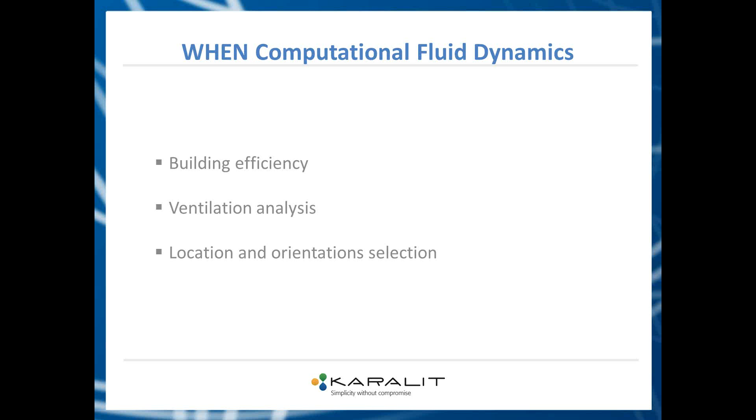Computational fluid dynamics, also known as CFD, is the most sophisticated airflow modeling method, and can simultaneously predict airflow, heat transfer, and contaminant transportation in and around buildings. So CFD provides answers to different questions. Let me throw out a few of them. Number one: what sort of temperature distribution could I expect in an atrium under clear sky and summer conditions? Maybe another question: will the arrangement of supply diffusers provide adequate air movement? Or is the location of the radiators going to provide good comfort conditions? Maybe, are there any regions of stale air inside the buildings? So those are a few of the questions that CFD answers.

Let's analyze a few of the advantages of doing CFD. Number one, we lower the construction cost by leveraging simulation rather than physical mock-ups or prototypes. There are money savings because we avoid physical wind tunnel tests and field measurement. Another way to look at it: you can have faster time to market because you have prediction capabilities performed virtually. You can have more energy efficient buildings, and you can create more comfortable living environments. So those are a few of the values that doing CFD can bring you.

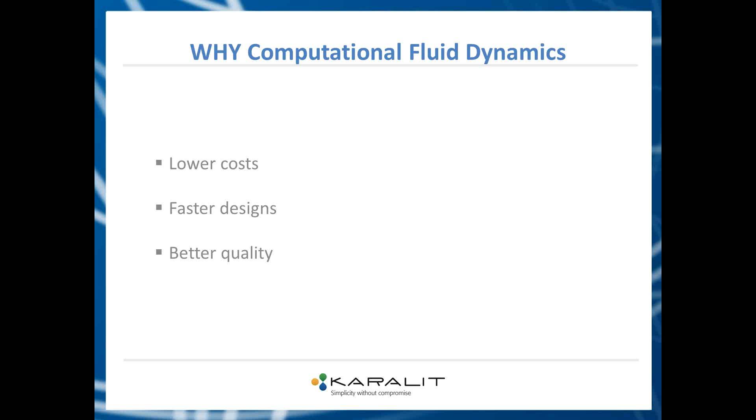Let's review now a few more stories with some practical cases from the field, presented and discussed by an expert in the field, Ricardo Rossi. Ricardo, please join me.

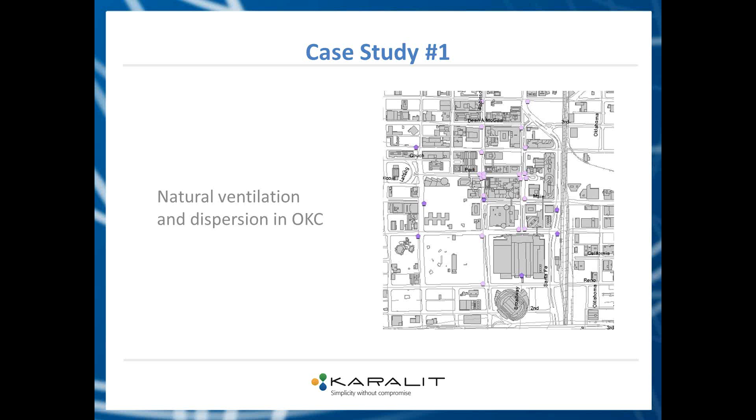Today I would like to show you some examples where CFD can be used to improve the design of buildings and also the design of the built environment in general.

I would like to start with some results about the simulation of the wind field and dispersion in Oklahoma City. For those familiar with OKC, you will probably recognize the Chesapeake Energy Stadium in the foreground, and in this urban area we also have some high-rise buildings in the background in the city center.

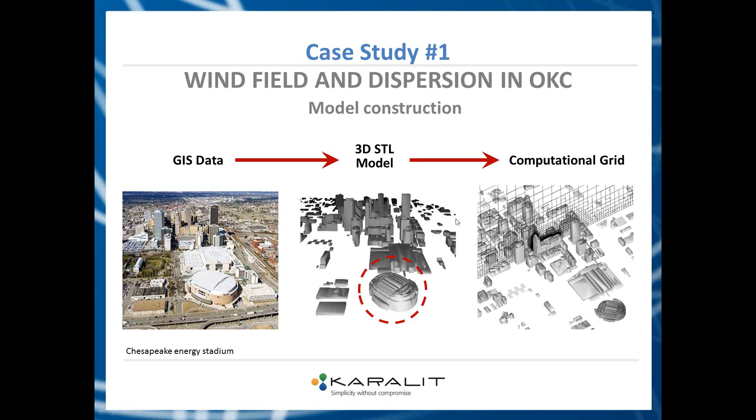To perform this kind of simulation, we need to create the geometry model first, starting from GIS data, where GIS stands for Geographic Information System. Then from the STL, we need to create a computational grid, which in this case will look a bit complex because of the complexity in this geometry. I'm not going to go too much into the details for the grid generation, but Alberto in a few minutes will show you how easy and fast this task is in Catalyst.

Of course, when buildings interact with the wind, there is also a lot of turbulence generation, as Alberto will show you afterwards in a simpler environment.

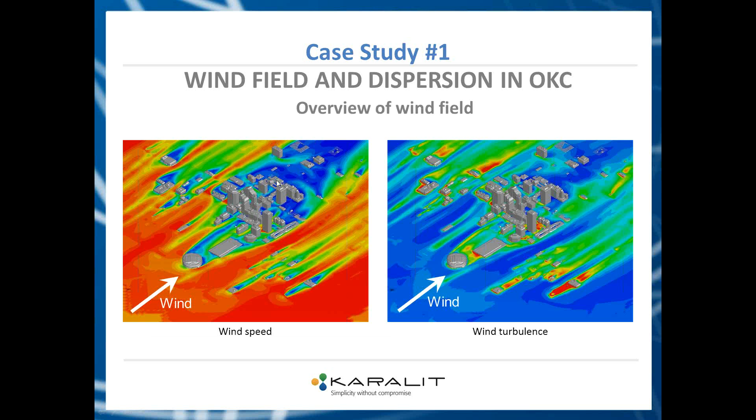Keep in mind that the wind is exactly the same in the two cases, and in particular we are dealing with this scenario where we have a very strong separation once again downstream of the city center.

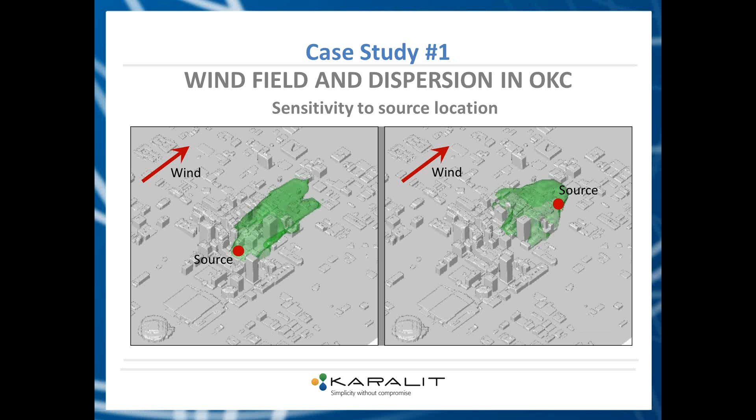The last thing I would like to discuss is the effect of the wind angle, and to do this I'm showing some results for a slightly simplified urban geometry. Now I'm not taking into account all the details.

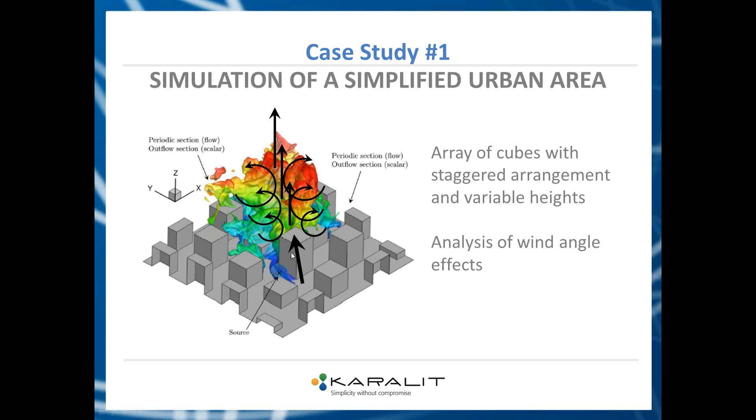So once again, we have a source here for pollutant generation, located next to the tallest building in the domain, and we're going to take a look at the dispersion process downstream of the source. So here's the first movie.

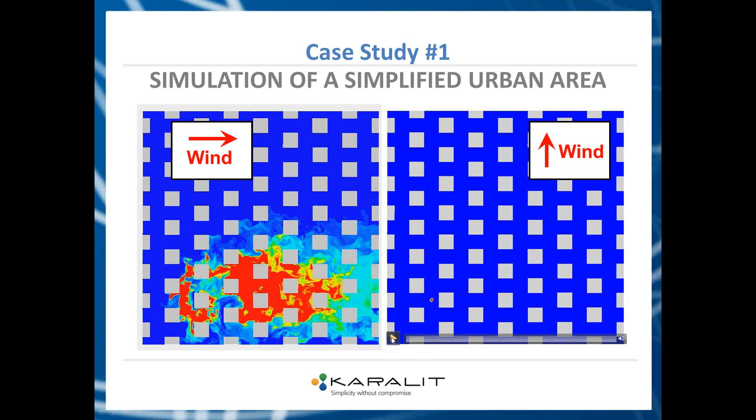So now let's take a look at the other case. Now the wind is coming from the bottom and moving to the top of the image. Once again, we are looking from the top at the contour map of the pollutant concentration.

Here is the source, and you can see that at the very beginning the pollutants are moving downstream. Only after a few seconds do you see that there is also some upstream movement of the pollutants.

The interesting thing here to note is that there is a very different spread in the span-wise direction, because now the buildings are aligned. There are channels basically created in this direction of the flow, and because of that there is much less spreading of the pollutants in the span-wise direction.

So again, this is just to show you another result that should bring to your attention how much you can gain out of a CFD simulation. For now, I'll stop here, and I'll go back to Alberto, who's going to show you a little bit of a demo with Karalit from this kind of application.

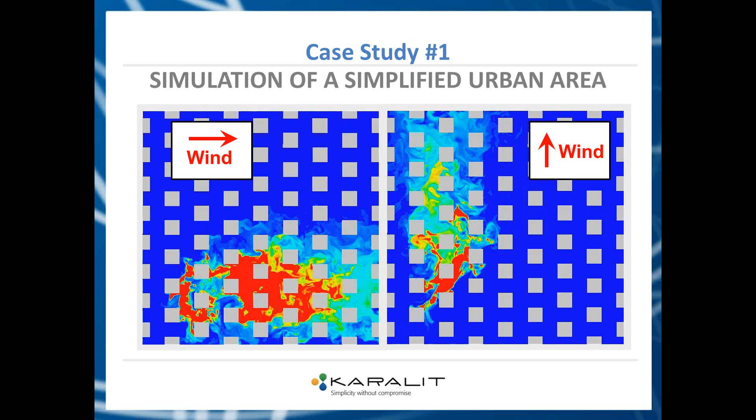Thank you, Ricardo. That's a great story about Oklahoma City. So before going to the live demo, let me give you at least a couple of reasons why you want to use Karalit CFD to perform this type of analysis.

Well, the first reason is Karalit CFD definitely eliminates the meshing stage, saving up to 99% of the user preparation time. This is due to a technology we have that is based on the immersed boundary method, something we are not going into during this webinar.

The second reason is that Karalit CFD does not require any in-depth CFD knowledge because of the use of customer-specific apps. Today I will show you the app just developed for architects, specifically for you, architects and civil engineers, to support your specific design flow and validation.

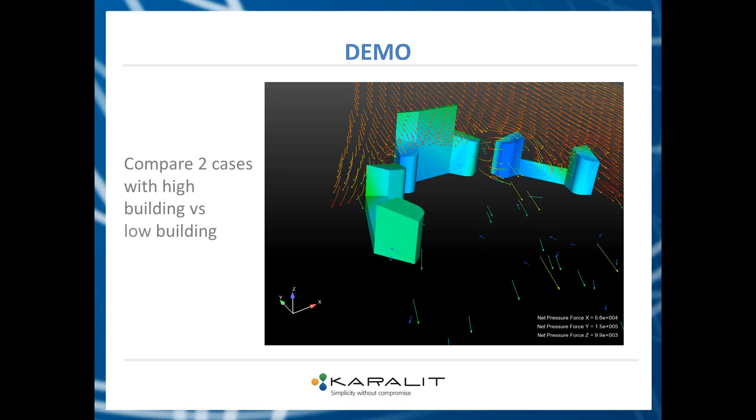Okay, so now let me iconize the presentation and run Karalit. This is how Karalit is showing. Let me make it a little bigger.

So the first step to do, well, we are going to create what we call a new case. Let's call it case number 1. So the first thing is that we are going to say that, well, this is what we call environmental flow, used by architects and civil engineering.

We're going to import some surface. Remember, the first step is to import the CAD geometry. And here we are going to import the west side of the plaza. You can see here.

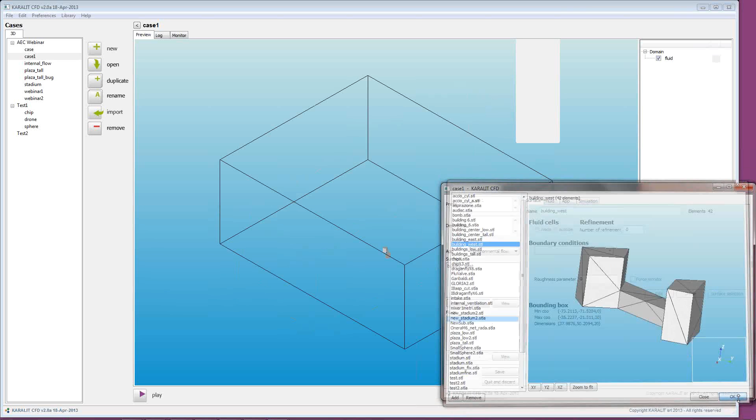I'm going to specify a few parameters for the grid generation. We're going to import the east part of it. Okay, I'm going to define the same.

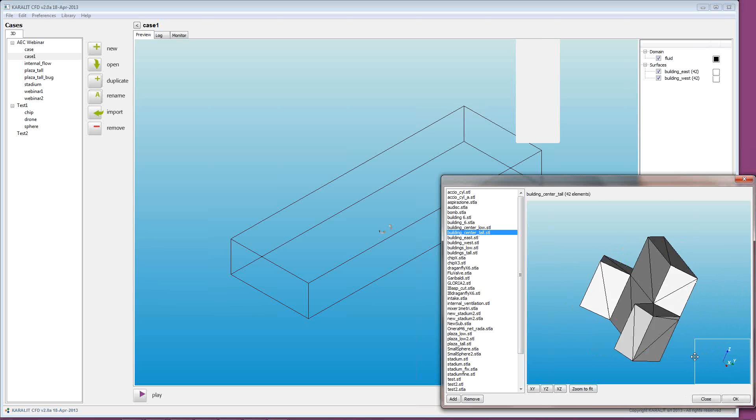The third thing we're going to do is import the high profile building that is going to be at the center of the 3. Here we go. Okay, say OK.

Define a few parameters for the grid, and so on. You can see here, this is where, that's how the 3 buildings are going to look alike.

Okay, I lost my window right here. Sorry about that, I lost my window.

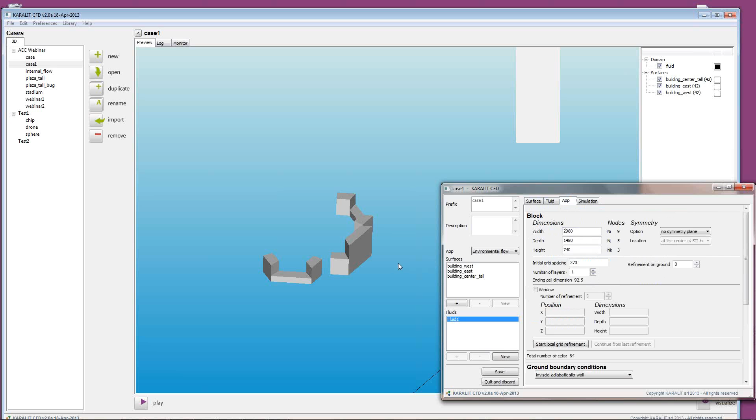So the next step is, as you can see here, let me take a step back. As you can see, the box here shows the area of the simulation. Maybe what we want to do is, very far from the building, we want to take a little smaller area.

Like for instance, we're going to do, let's put 200. Those are meters, by the way. Okay.

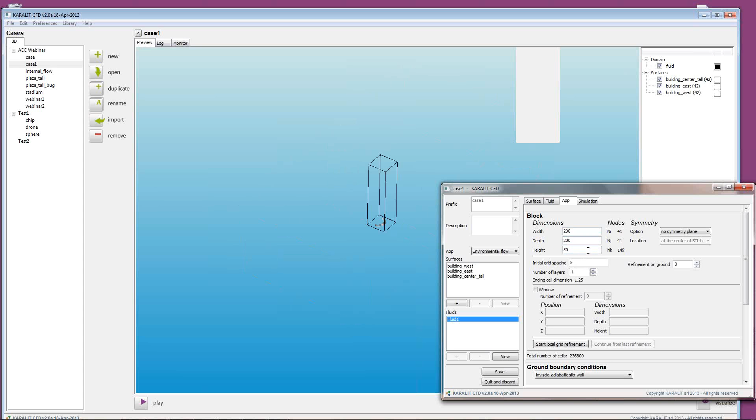As you can see here, that's what we are going to have, a smaller boundary where we are going to be interested in the area, right?

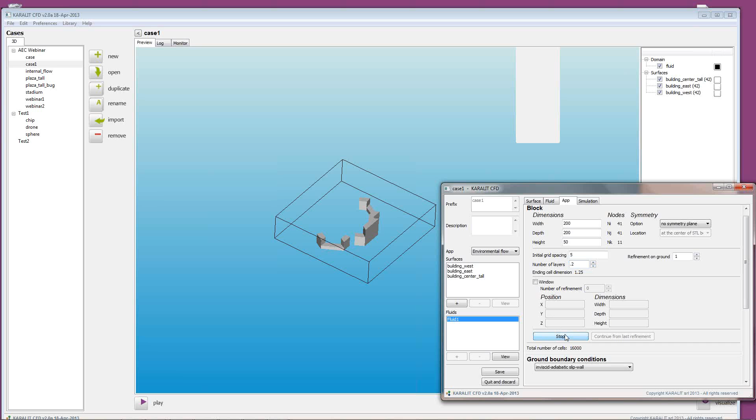Now, we saw before that there's a grid generation, so that's what we are going to do. We are going to start a generation of a grid that is going to be used by the software to perform the calculation. As you can see here, the grid looks like this.

Let me give you a little, okay, where we have refinement close to the ground, much better refinement close to the buildings. And while we are far from the buildings, we can use a coarser grid. Obviously, this grid is in 3D, as you can see.

The other thing we have to do is define some parameters like the wind direction, the wind velocity, and let's put a value there. It's 5 meters per second.

Then we have to decide where is the wind direction. So let's put it as something like that, north-northeast. Okay, so those are the information that we need.

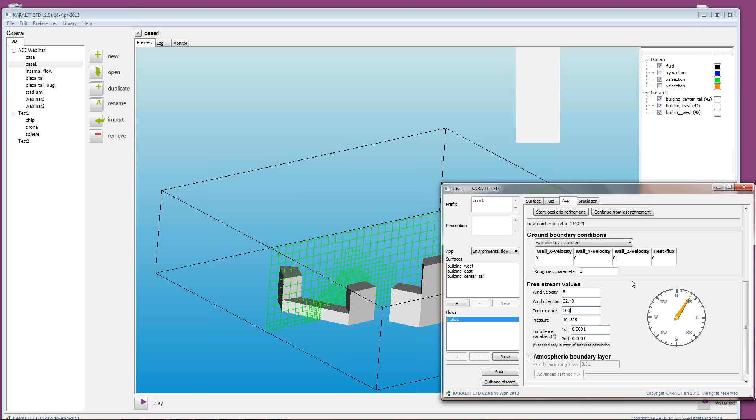Maybe what we're going to do is a calculation at summer day, 300 Kelvin degrees, obviously. The other thing, the last thing we have to do is specify some information about the gas. The gas is going to be the air. It's going to be a turbulent flow, and that's pretty much it.

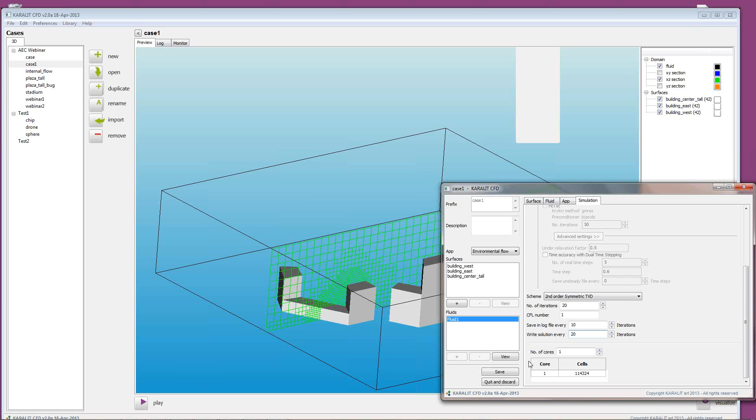Really, the last thing we have to do is define how many iterations we want to have to do the full simulation. Obviously, we can go hundreds of those, but for the sake of this, just put 20. I think this is going to give us a good indication.

So we save it, and then at this point, we start the simulation.

So at this point, what we're going to do, well, let's look at the log file. We see here that the software is going to take into account the grid, is going to take into account the geometry, and is going to perform the calculation.

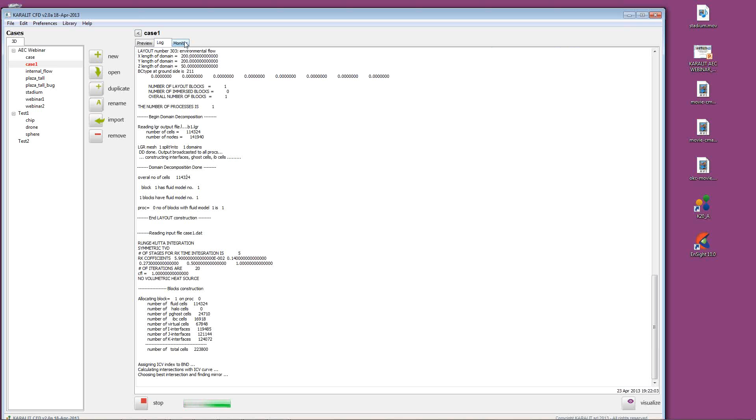And this is the log file that if you want to have a look at it, you can monitor it. Let me jump to the end of it while this is crunching, so this is going to be a little more interesting. So this is the outcome of the simulation.

So you can see here, those are our buildings in full 3D. The buildings are colored, showing a color map of the pressure. Actually, it's the relative pressure, the pressure over the atmospheric pressure. This allows us to calculate the forces acting on the buildings.

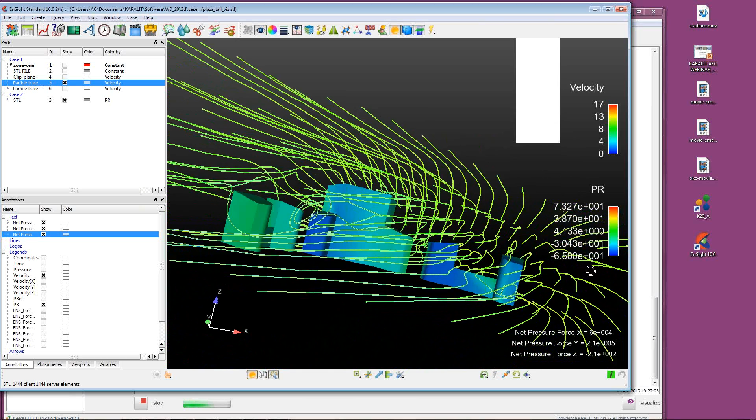Another thing we can do is also show what we call the particles of the wind. Okay, so let me show you the particles. If you take a particle of the wind, this is a trajectory basically of the wind. And one thing we can do here is let me start an animation of it.

Okay, so you see this is the effect of the wind. It's very easy for an architect to understand what's going on now with a very visual indication.

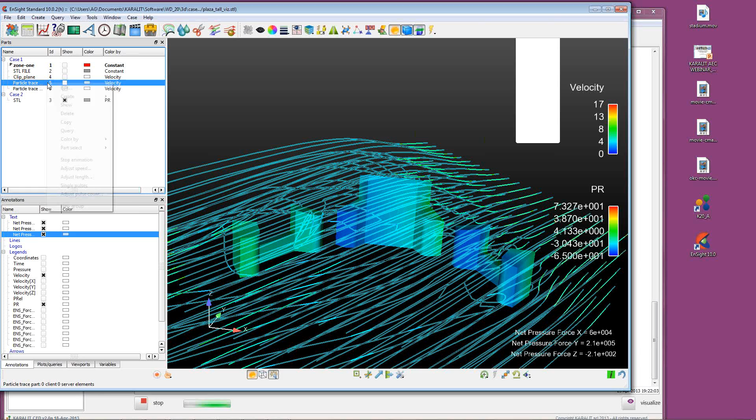I think why we might be interested here is to take a better look. What we are interested in is to understand what happens for a man standing in front of the building. So what you're going to do is have maybe a 6 feet mark, and you're going to see the effects of the particle at 6 feet.

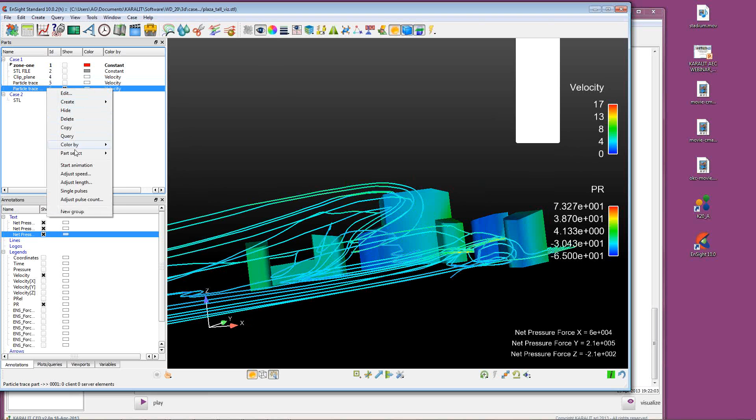What we can do is start the animation of it and start the effect. I hope this is very clear for an architect to understand what's happening at this point. Another thing we can do is understand the different velocities and speed.

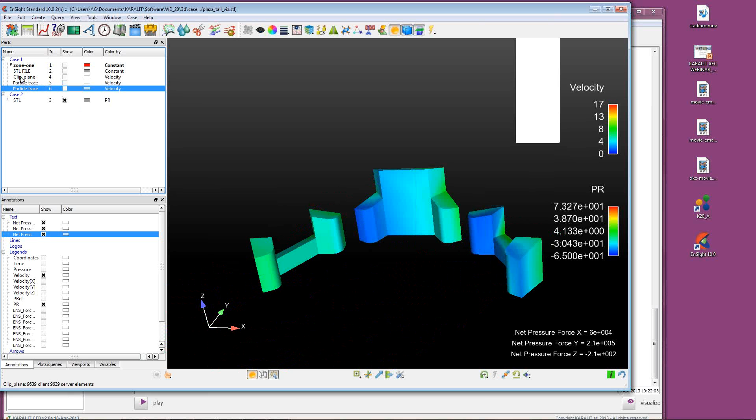Let me show you right here. So this is the velocity. Can you see here the various velocities?

What you can do is actually interact with that. You can go in kind of a section dynamically through the entire plaza and see where you can gauge the effect of the wind on a person. So this is what you can do with our software with a full simulation.

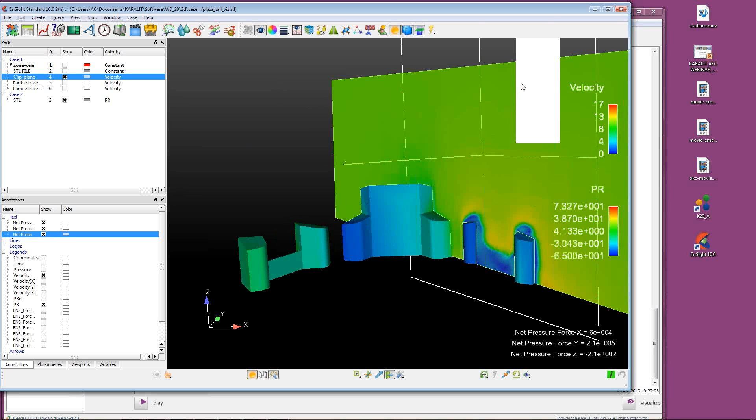Probably if you have 200 or 300 iterations, you will see a better convergence of that. But it just takes time, so you need to get an extra cup of coffee. As you see, it was very quick to run 20 iterations.

So now what we want to do is evaluate the effect of taking a different geometry, as I said before, the same building but with a lower profile, and see what are the effects of that. So let me open again our case, okay?

And we are going to replace the tall building with something that has a lower profile. Okay, you see that? That's a lower profile.

I'm going to put in the usual information for the grid. I'm going back to the application, and let me change this. We define a smaller area for our simulation, and again...

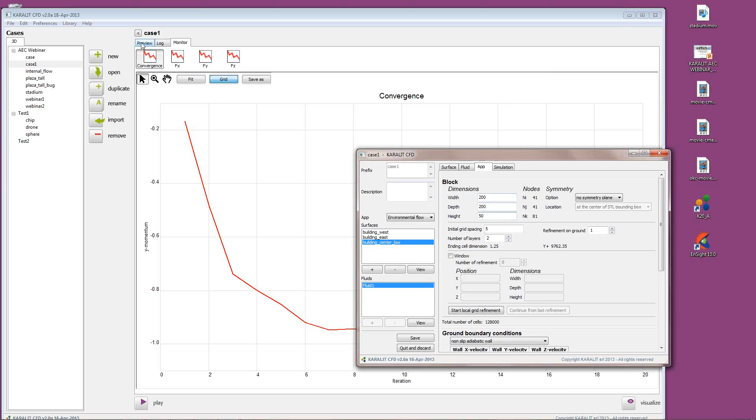This is going to be our new plaza. Okay, start again our grid generation using our immersed boundary method, which is a unique, proprietary methodology. Save it. Now we are ready to run it again.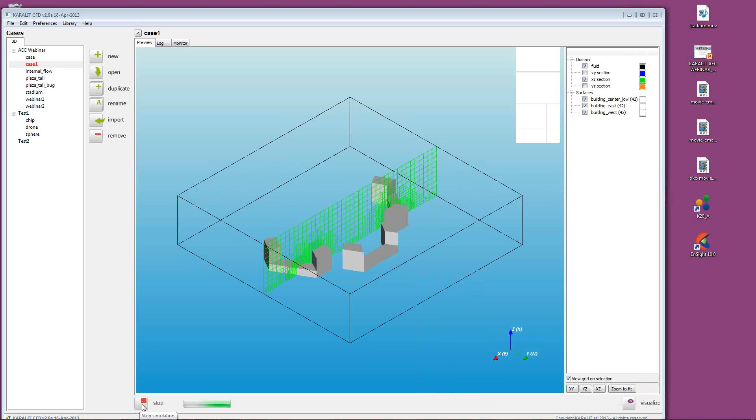So those are the steps that an architect is going to perform to do any simulation.

Okay, so while this case is running, as I've done before, let's take a peek at the comparison of the two scenarios, or the two cases that we ran.

So what we are going to see here is that on the left side we have the low profile building, and on the right side we have the high profile building. See a pattern here? You see the difference?

On the right side, as we are expecting, we were expecting obviously more turbulence. As you can see here, this area probably is not going to be very comfortable for people to stand, while with a lower profile we have better smooth lines, so less turbulence.

So this is a great indication for an architect to select the best scenario for building a plaza. And this is proven, and this is something you have done virtually without any testing.

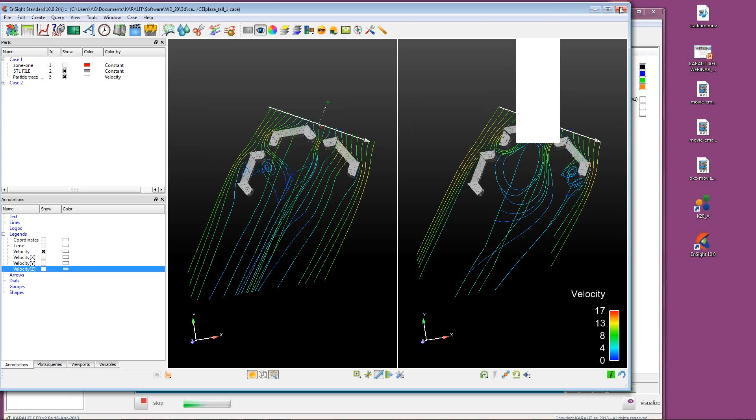So far we've used a very simple geometry here. Let me switch gears and show you a different case where we have definitely more complicated geometry.

This is a real geometry, about a stadium.

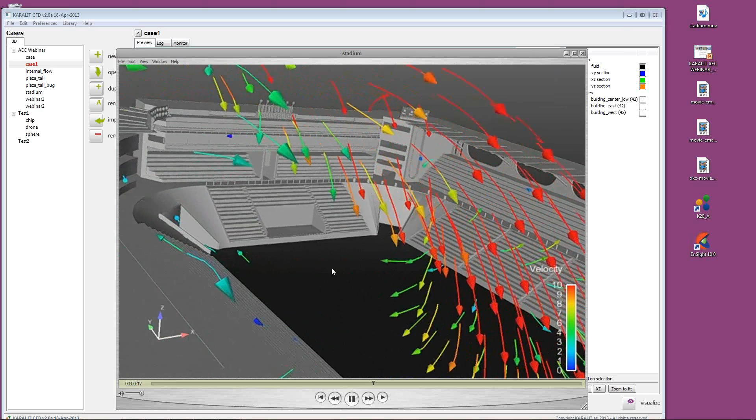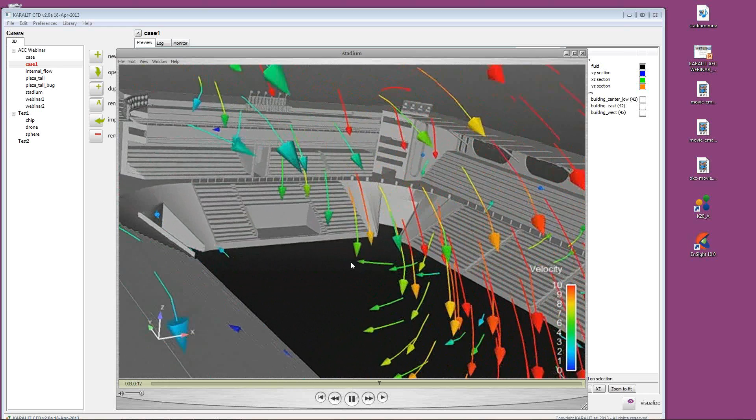The study here, and the challenge for the architect, was to determine if the players on the pitch, this stadium being for soccer, or what in Europe they call football, would be affected by the wind in every condition. Basically the stadium is going to offer a kind of shield to the wind, so that the players on the pitch are not going to be affected.

So this is a more complicated geometry. Obviously it's going to take a little more than 2 minutes to run this. We're talking about minutes, maybe a couple of hours, to run a complete simulation of this.

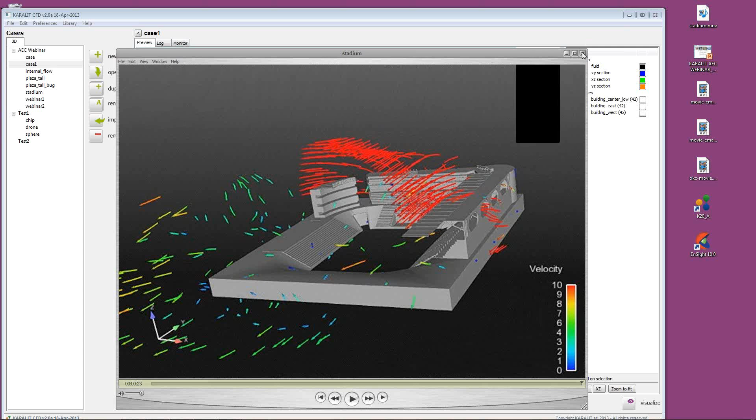So this is what I want to show you, and what I'm going to do at this point is go back to Ricardo. Ricardo, please introduce us to the next theme that we are going to talk about, internal flows.

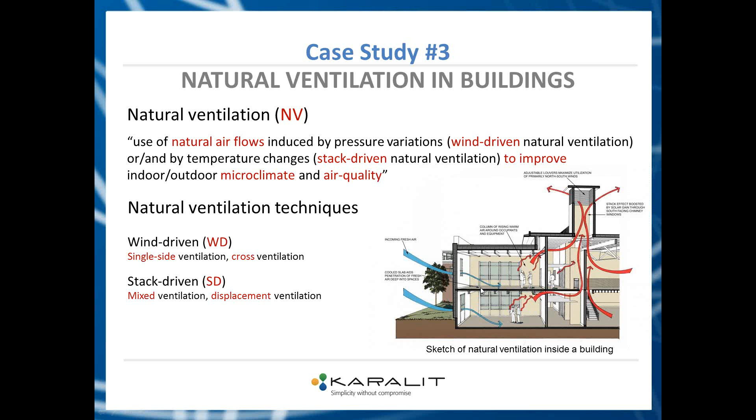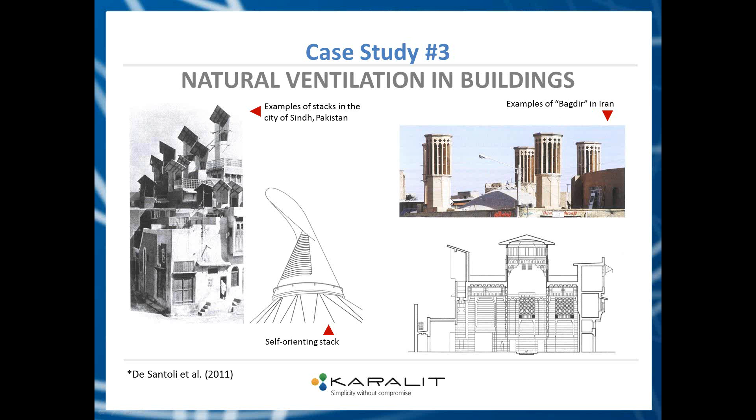For today, I'd like to focus on a case study which is a bit more recent - the Y2E2 building at Stanford, which is home to civil and environmental engineering there. As a visiting scholar, I was involved in this project where we performed analysis of a process called night purge.

The basic idea is to use the cold air in the evening to cool down the building and get lower temperatures inside the rooms the morning after, so that you would save some energy out of it.

The target for that was pretty challenging. The design was targeted to 50% energy reduction and 80% of the building lit by daylight. To achieve that, the building has sensors inside to monitor its functioning, and energy modeling has been performed with tools like eQuest and Energy Plus that perhaps some of you may be familiar with.

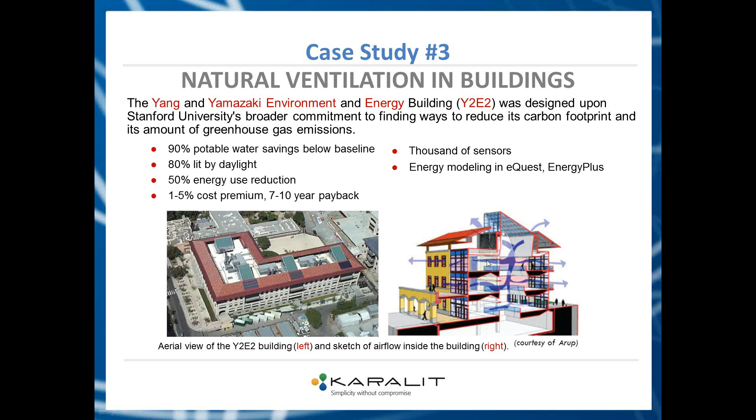Let me spend a few words on how this night purge process works. Let's imagine that during daytime, the envelope of the building and the inside of the building are warmed up by solar radiation. If we look at the temperature inside during the day, we can see temperatures in the rooms and offices going up, reaching a maximum around 4 o'clock in the afternoon.

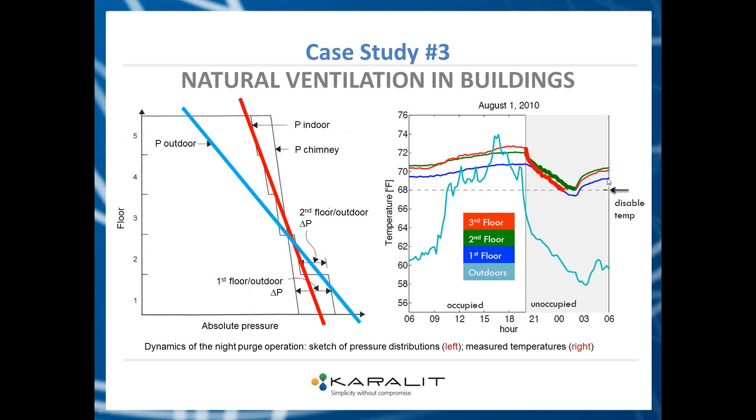Around midnight, we have a disable temperature setting, because we don't want to freeze people the morning after. So we want to go back to a temperature level which is lower than without the night purge, but still more comfortable for the occupants.

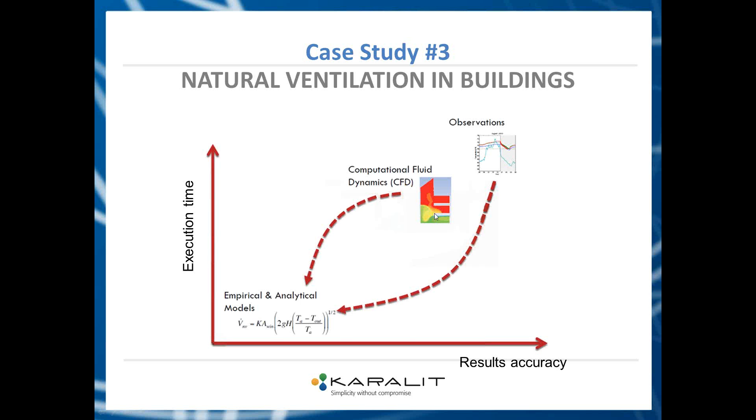And then we have CFD, which of course can be used to learn more about parameters in these approximated models, and to gain more insight into the process of night purge or natural ventilation in general. With this very last slide, I just want to show you the process of mixing inside the building as the night purge goes by.

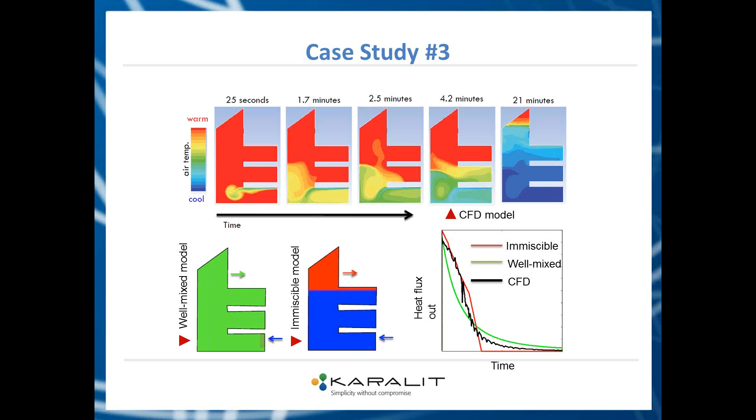Now let me show you how to perform a study on internal ventilation for a building, following what Ricardo was saying. Let me minimize the application, and let's go back to our software KARALIT.

What I wanted to show you is a case where we are going to study different types of ventilation for a building, comparing different scenarios where various options are considered using various window locations and openings.

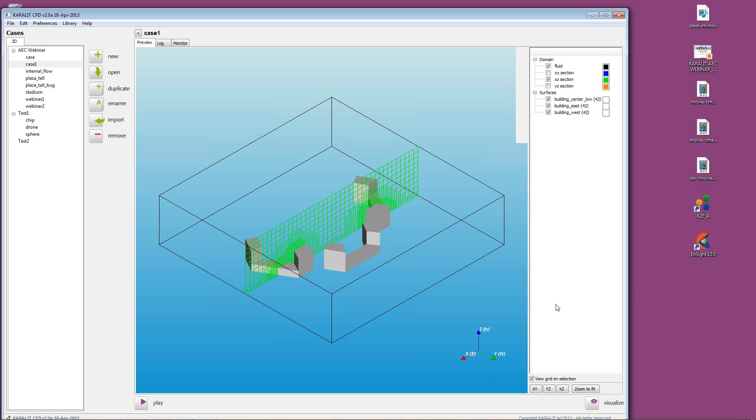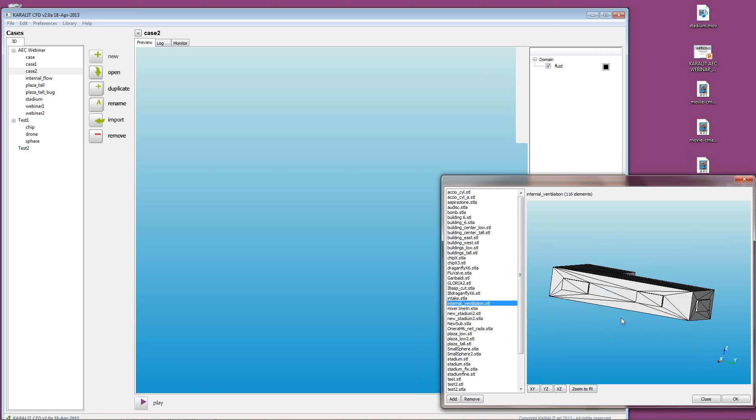The geometry in this case is pretty easy, but it just gives you the idea of how to perform studies for internal ventilation. So we import it, and we are going to set some parameters for the grid.

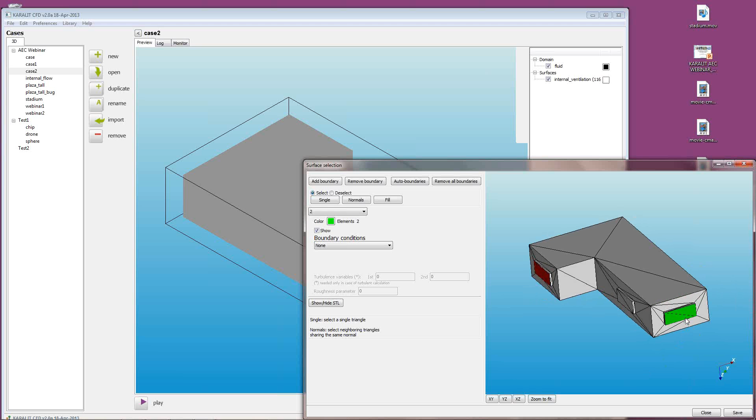Another thing we are going to do is define pressure and velocity for the input and output. In this case, we'll assume the wind is coming from this direction, what we call the Y direction. So we're going to specify the wind direction, let's assume 3 meters per second, and the temperature, let's say 300 - a hot sunny day.

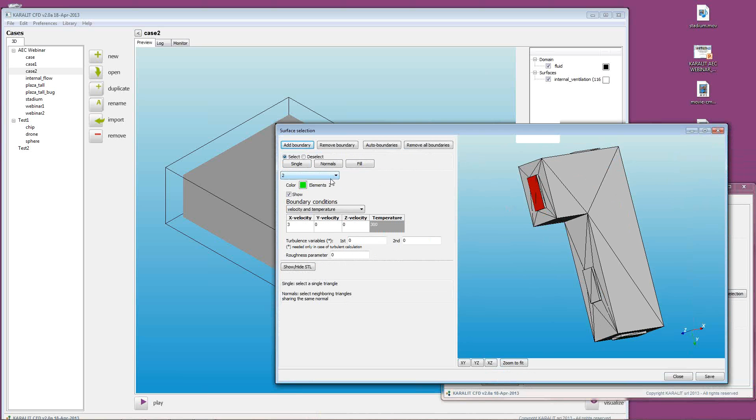The other thing we can do is define the pressure of the outlet, which is going to be just regular atmospheric pressure. Save it.

The next thing we have to do is create our grid. Remember the grid we want to create - here we're going to create some grid spacing. Let's put 2 here, and create the grid that we are going to use for our calculation.

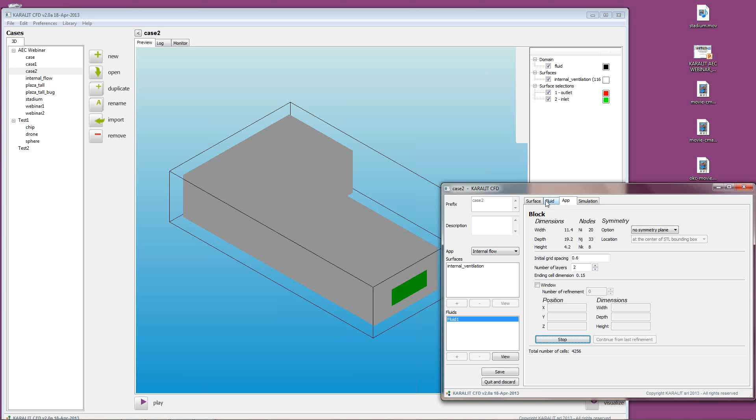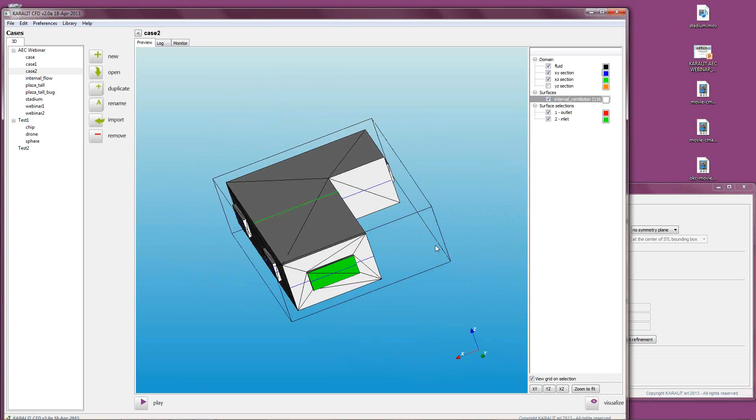We have a slightly different scenario than before. This is an internal case where the grid is going to be inside the building, not outside. Let me show you the grid that we have inside the building. This is in the other direction, from the top actually. This is the grid that we are going to use. Let's see if I hide the building - that's what it's going to be.

Remember, we are going to use a full turbulent model. Here we're going to use some initial parameters of speed and temperature. That's pretty much it, that's all we need to do.

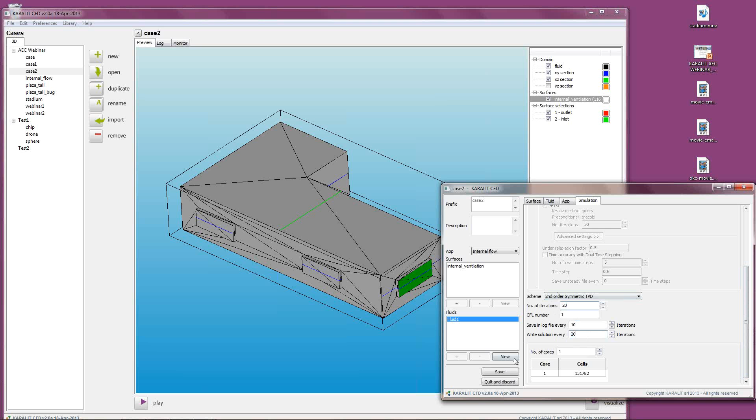Oh, I forgot - I need to define the number of steps. Let's start with a very quick example of 20, just for the sake of it. Save it, and I believe that's all we need to do. In a couple of minutes you can define all the parameters you want. We start the calculation, and the software is going to perform exactly the same steps: take the geometry, take the boundary conditions, crunch them, and start the actual simulation.

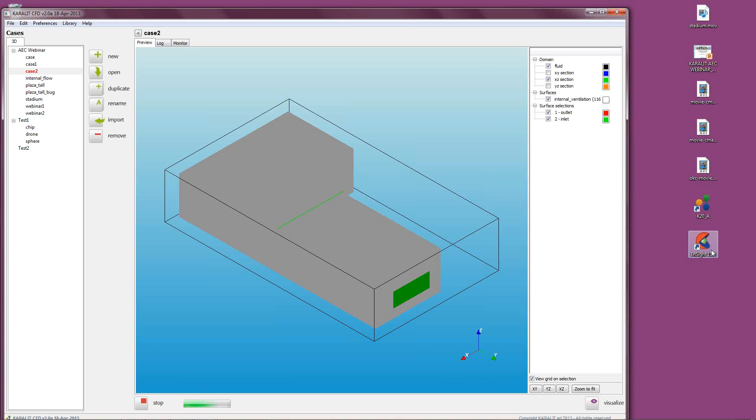As you can see, no further interaction is requested by the user. So while we are crunching some numbers here, let's see the output of this simulation.

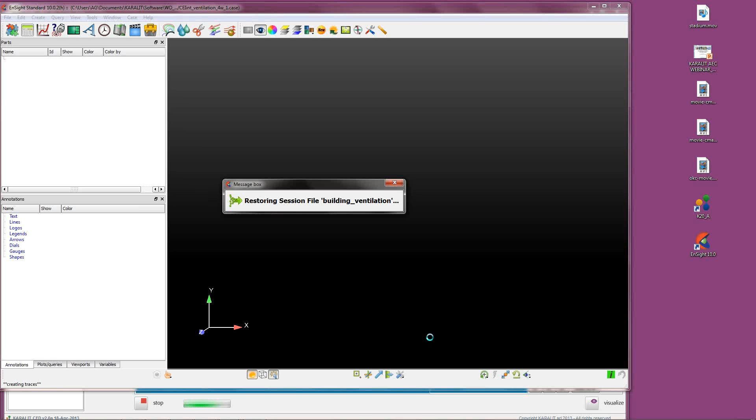What I want to do is compare 4 different scenarios. The 4 different scenarios are relative to different openings of the windows: 1 window, 2 windows, 3 windows, and 4 windows. The objective of the study is to ensure we have correct, ideal ventilation throughout the entire volume of the building. This one on the left side is the result of the case I just described, with only one window open for the entrance and one for the outlet.

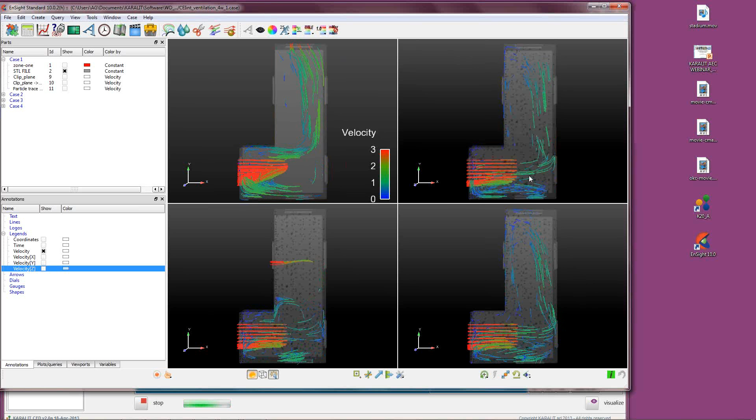That's it. On the right side, top right, we have two windows open, one here where my cursor is, and one at the usual end of the building. Bottom left, we have three windows open - you see this window is also open. In number 4, we have all the windows open.

So here we have different scenarios that an architect can use to evaluate the best ventilation possible for a given building. It's a very easy, colorful, intuitive way to perform a what-if scenario - very useful for architects, because you don't have to build a prototype.

Everything is virtual. If you go back to our simulation, I think we are close to our 20 simulations - you can see the convergence is there. We just need a few more seconds to close the 20 iterations. So really, in a couple of minutes, you have the entire case solved.

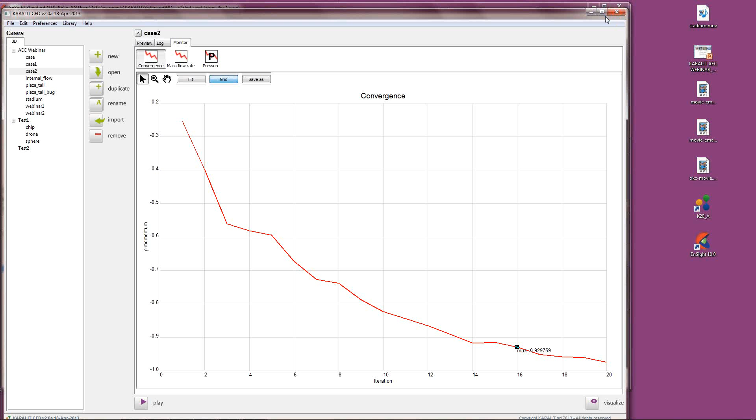So those were the two demos I wanted to show you, of how Karalit can answer and kind of duplicate what war stories we heard from Ricardo can be simulated with our software. So let me go back to our PowerPoint presentation just to summarize and conclude.

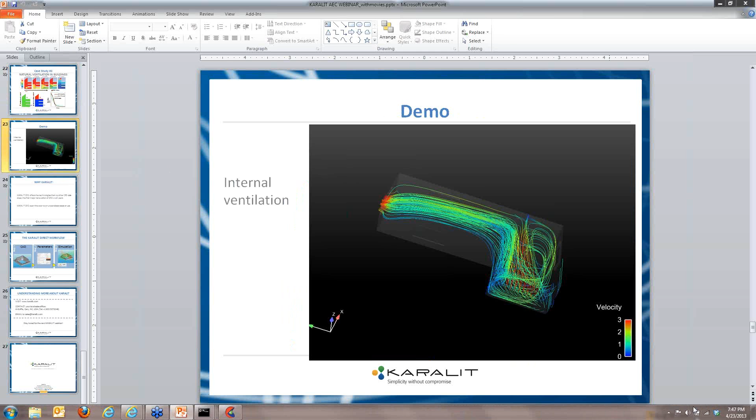Okay, so we saw this internal ventilation demo, and what I want to do is recap what we've seen so far by starting to summarize the two major values offered by Karalit CFD.

Number one, Karalit CFD streamlines and definitely shortens the time to perform a CFD simulation. Number two, Karalit CFD does not require any in-depth CFD knowledge because of the use of customer-specific apps, such as the app we saw and used today, developed specifically for you architects and civil engineers. You could see that it took me no time, no effort to input very simple and intuitive parameters.

Speed and temperature, something that you are accustomed to dealing with. And again, remember the 3 steps that you needed to perform. Number one is import a CAD geometry from AutoCAD, Vectorworks, or Bentley, or whatever other CAD you use. Define some parameters and press the start button. Those are the 3 fundamental steps to perform the simulation.